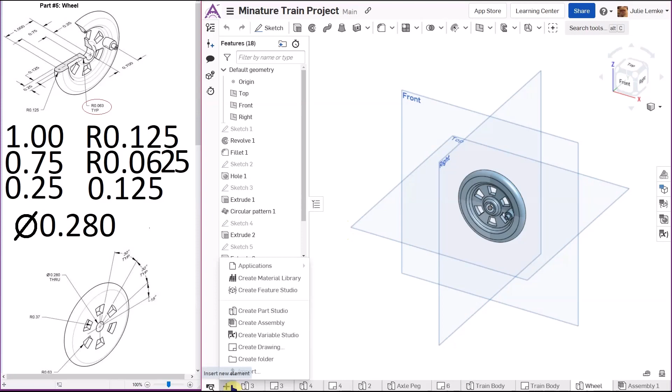So you're going to go to the plus sign, which is insert new element, and click on create drawing. The size drawing you want for this is size C, which is 4 times the size of size A. Size A is basically the size of one sheet of printer paper, and size C is like 4 of those put together. I've seen students make this work on a size A drawing, but things get a little cramped, so personally I'd say go with size C.

So you want ANSI C inch. If you don't see it in your templates because you haven't used it yet, just go to show Onshape drawing templates and it'll be in the list.

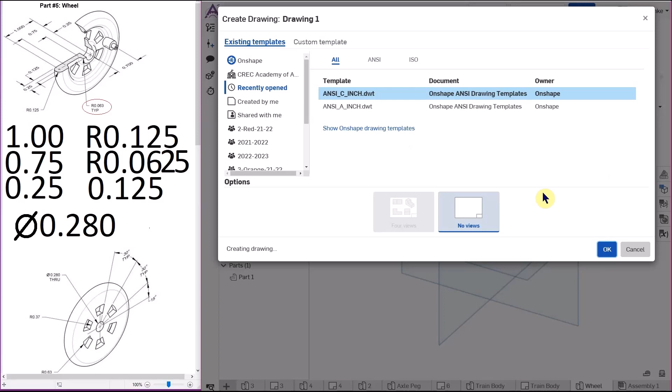All right, so from here we're going to grab our wheel and put the front view right here. The next view you're going to put in is either the right side or the top side, depending on where this piece is. So if yours is lined up the same way mine is, you're going to put in the right side. If yours for some reason is up here instead, you'd put in the top.

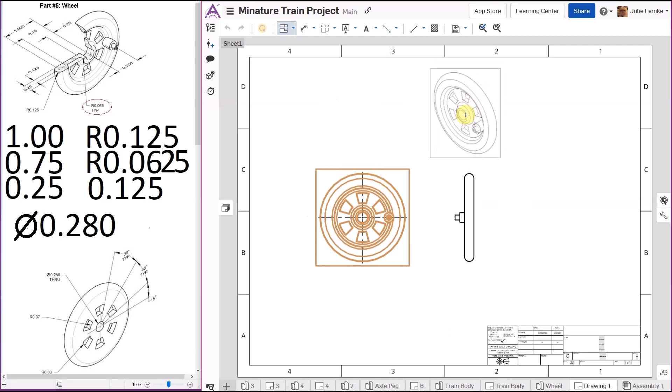Right, so our next one, we're going to click on our front view, and we are going to click on where the isometric one is going to go.

All right, and then next we can add in a section view. So what that's going to do is cut our object apart. I'm going to try to make sure I have this centered.

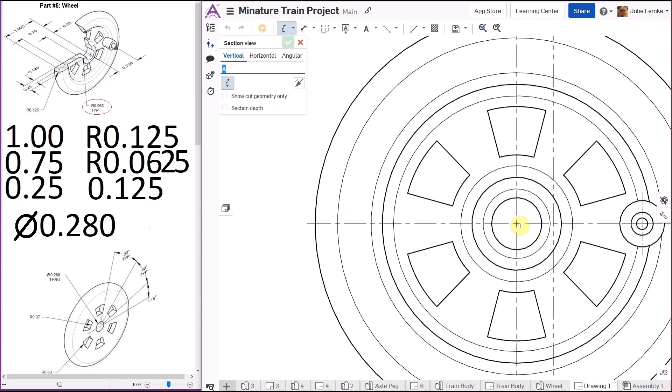Okay, so I have that, except it's going in the wrong direction. I want it to be my top view. If you happen to have this where your right side is your section view, then you're all set. If not, you're going to have to click on horizontal and then move it for the top view.

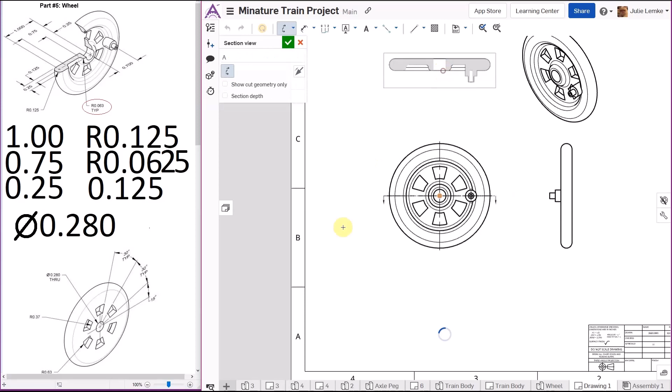Oh, and if you're using a mouse and wondering how I'm moving this around, it's called pan. The scroll wheel zooms in and out, and if you click on it and click and hold, you can move this around. It's quite useful for when you're zoomed in and trying to look at just some pieces next to each other where it's just slightly off screen.

All right, so what we can do next is add in our detailed view. On here everything gets a little bit cramped, so what I'm going to do is place in just the normal circle detailed view. I'm going to place it roughly about here.

All right, then I can place my view right there. All right, so let's see. Yep, we got it where we want it.

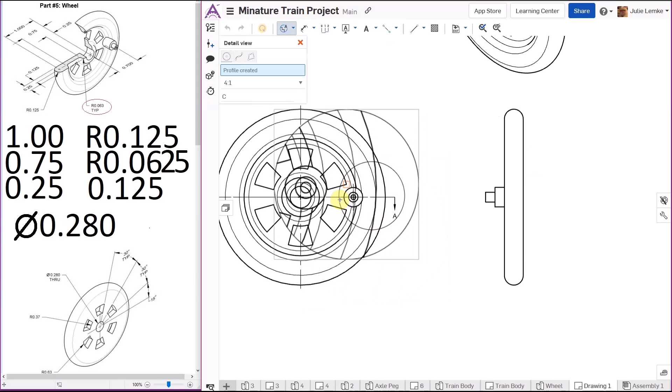And then we're going to add in another one for this feature right here. I'm going to click a little bit off to the side. The reason for that is I want to see the outside edge and the circles right here that I'm going to be dimensioning, so I want to move that over to here.

All right, if for some reason you have your letters overlapping and you need to move them around, you can click on the letter and move it. You can also click on the blue dot and shift it around if need be.

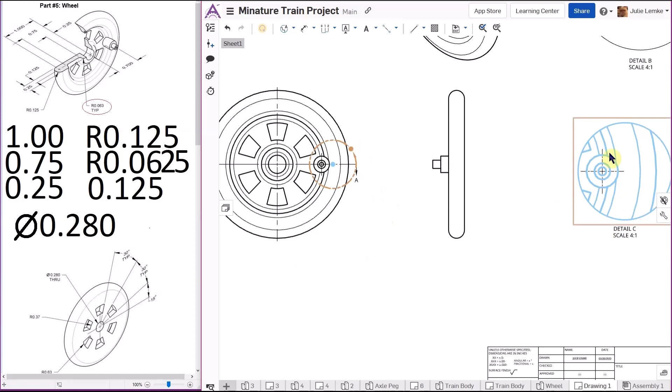And you can see how the detail view is moving around, and if you hold your mouse over it, you can kind of see which one it's referring to. So same thing goes for here, and same for over here. So it's kind of showing you where everything's linked together.

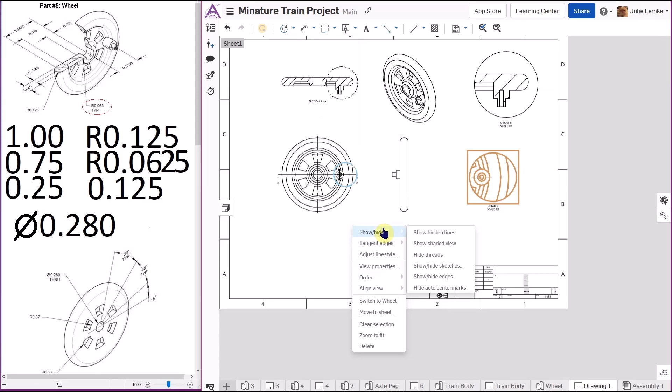All right, so let's just say for this, you also wanted a back view. What you just do is move one of your detail views away and then go to projected view, click on your right side and move it over. But that's up to you if you end up needing one to add in more dimensions.

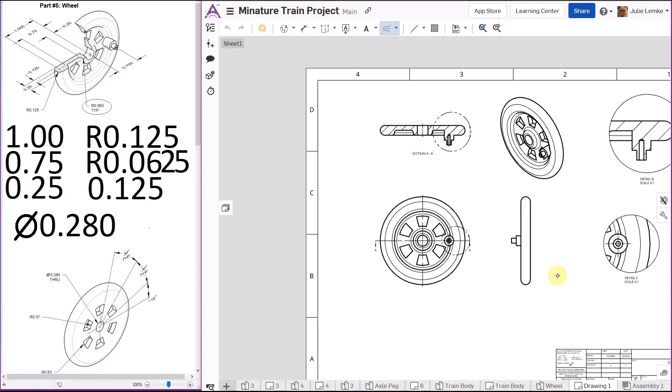If your dimensions are cramped and you need to make some space, also we need to add in our center lines. For this part, I like to use the edge-to-edge center line, just because there's quite a few center lines, and if you use the 2-point, sometimes it works nicely and other times not as much. So I just find it easier to use the edge to edge, although for one of these I will use the 2-point, because I'm going through quite a few different components here.

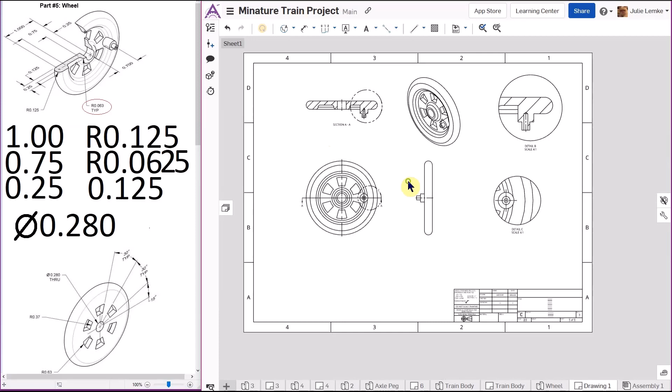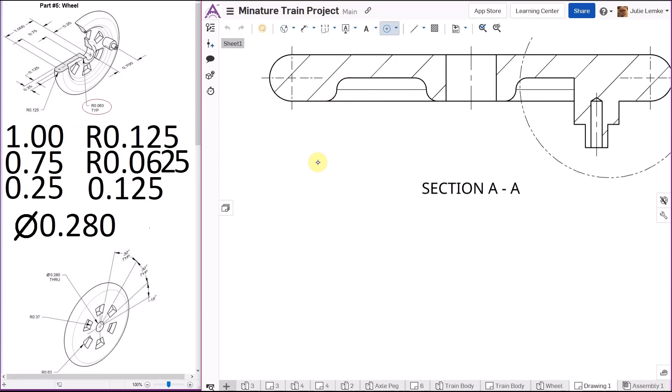All right, and then now we want to add in some center marks. So I'm not going to add them to these right here because it's just going to get very cluttered very quickly. So with center marks for your arcs, if you add it in and it's making a mess of your drawing, then that most likely means that they're too small and they're not necessary in that location.

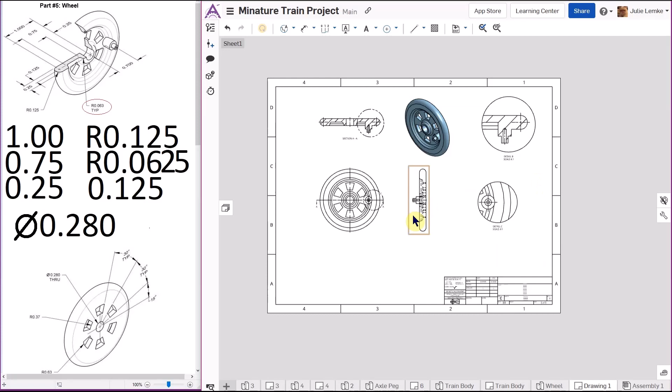All right, so I made sure I was out of the center mark tool. I can right click on my isometric, show hide, show shaded. And I want to show the hidden lines on my solid view over here, not the section one, but the other one. So show hide, show hidden lines. So that shows us that even though it looked pretty blank and not like anything was going on, a lot is going on from that view.

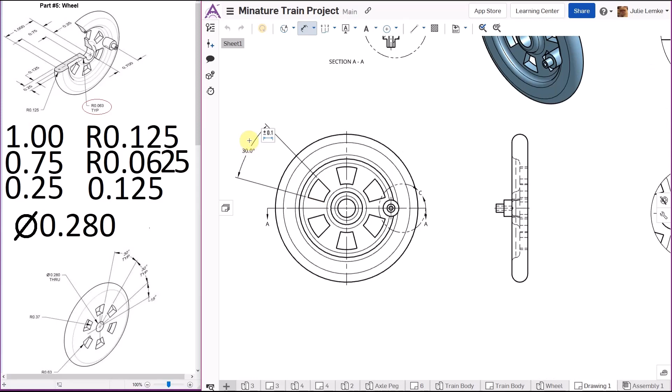All right, so next we want to add in some dimensions. So what I just did is use the normal dimension tool and clicked on these two slanted surfaces. And that brings in my 30 degrees. So that is one of these over here.

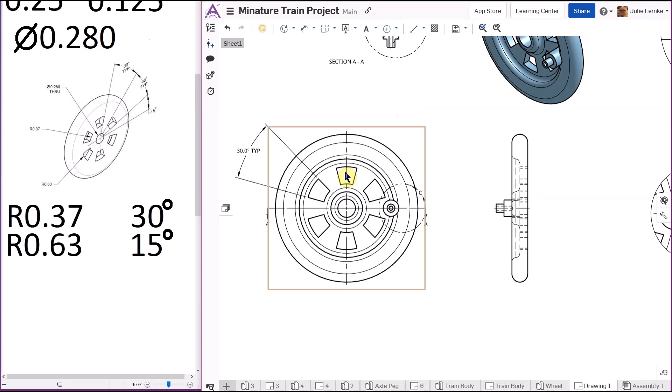All right, so this has TYP for typical. So how to add that in, sometimes it's easier to get out of the dimension tool to click on it, and then you just double click on your dimension. So you're gonna click over here, do space, capital T, Y, P, and then you can click off to the side. So now we have our typical mark in there.

You're still gonna need quite a few more dimensions, so make sure you look at the dimensions you added to your part to have all the dimensions included in your working drawing.

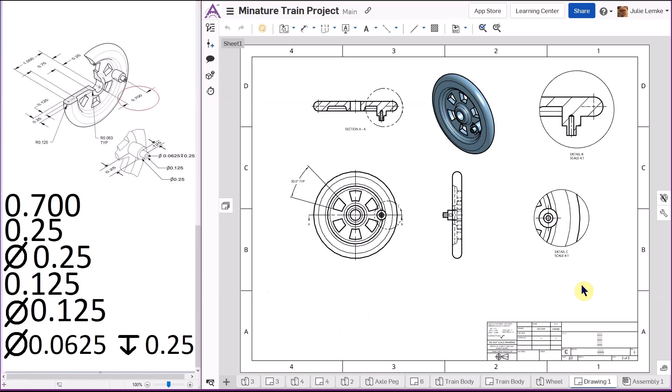Along with all the dimensions that you're going to need, fill in your title block. So make sure you have your title as wheel, your drawing number as part 5, and then also just to keep yourself organized, I'd suggest changing drawing 1 or whatever drawing number it's up to something that's more convenient to look through. So maybe name it wheel, maybe put in the number of the part like I did over here. Just do something that makes it a little bit easier to sort through all of your tabs to find what you need when you're putting things together later.

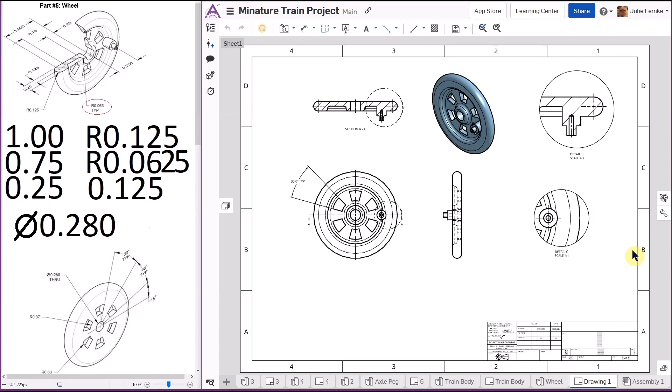All right, so just a quick reminder again, you still have quite a few dimensions to add in, so make sure you don't forget anything, double check, and good luck.